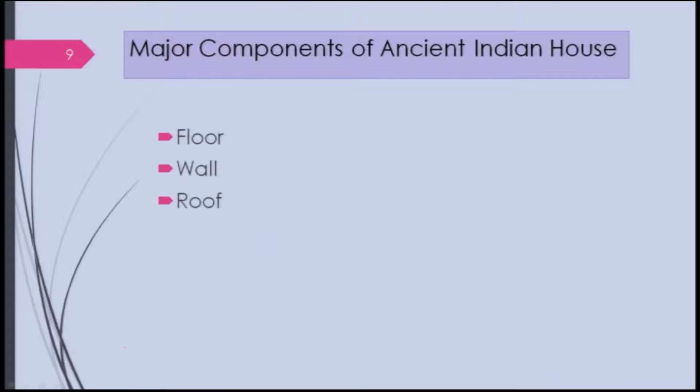So that is what we need to look at in our ancient Indian way of making and maintaining houses. If you look at the major components of an ancient Indian house, they are basically floor, wall and roof. Here I have shown you something about that.

This is your roof, and these are the walls. Of course, the floor is here, which you can call veranda kind of thing. So rural material house is basically made of stone and bricks.

Of course, bricks you can make yourself, not buy. I remember when I was a kid, local people knew how to make bricks. But today, if I go back to the same place where I had learnt how to make bricks in my childhood, they do not know how to make them, and they buy from factories.

And mud, which is plentifully available, and wood, bamboo and agricultural waste were being used for making houses, which was basically sustainable. Even brick is, to some extent, sustainable, though stone is not. Today what we use is not sustainable, but in earlier days houses were sustainable.

Let us see what we mean by mud, because today we are not aware about mud. In earlier days, mud was part of life, not only for agriculture, but for making houses and ponds, and several other things, as part and parcel of our life.

So mud is basically a mixture of different kinds of soil. It can be loam, silt, or clay. Of course, you will have to add some water. When you say mud brick, it basically means one that is not baked. Today we are using baked mud bricks, but when it is not baked, it is known as adobe, and it can be made by mixing mud with water and placing this mixture into a mold.

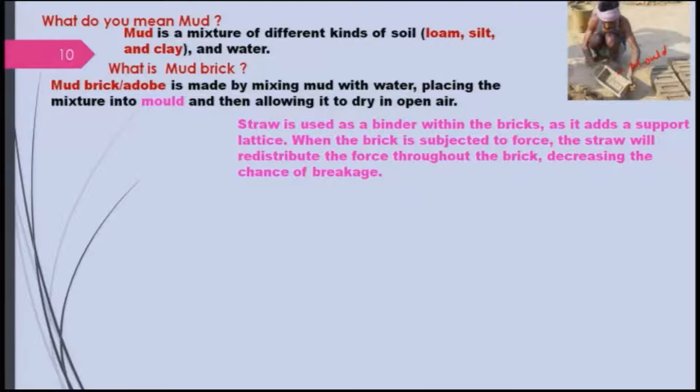People add straw and rice husk and other things to the mud. Straw is used as a binder within the brick, as it adds a support lattice, because whenever a brick is subjected to a force, the straw will redistribute the force throughout the brick, decreasing the chance of breakage. This is traditionally used, and similarly sawdust and other agricultural waste is also added to the mud for making bricks.

This is a house made out of mud, not only the wall but also the roof, in Punjab. Even still in some places it is being used. This is a pakka house, and there is a kacha house also, which is basically a mud wall with a thatched roof, but here the roof is flat and also made of mud.

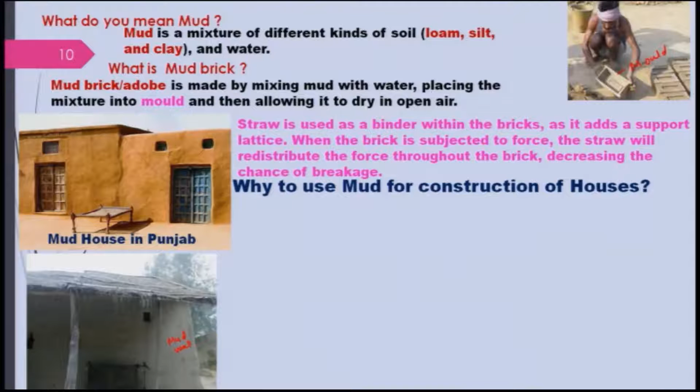Why do we use mud for construction of house? Because it is easily available for community participation and used by unskilled labor. If you look at earlier days in the rural areas, we had ponds. For maintaining ponds, you sometimes need to remove the mud from the pond, and that mud was generally taken by people who wanted to construct a house. There was a whole system cycle, beautifully narrated in several places, but unfortunately today the pond is not there, and even the mud from the bottom of the pond is used for the field for agricultural purposes.

Adobe or sun dried bricks are easy for cutting and adjusting the dimension of the mud brick, unlike the baked mud which is a little more difficult, though it can also be used. No energy is required for making the mud brick, as solar energy is used for drying, and cost-wise it's a lot of saving, almost 40% compared to regular brick. The use of mud in building gives good acoustic and insulation properties.

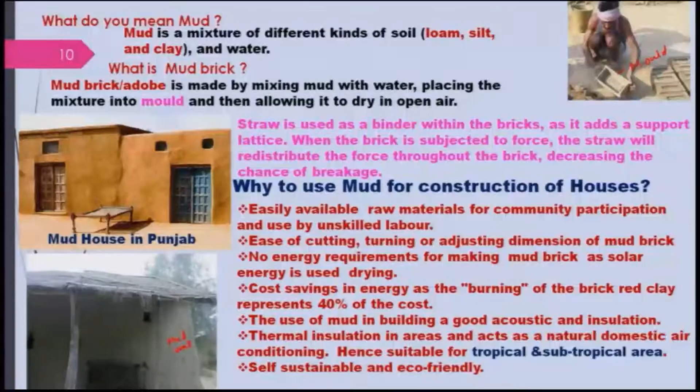Today people are using glass for window panes, and brick, and of course mortar and cement. Earlier days we used lime or mud, which is a better material compared to Portland cement today. It is self-sustainable and eco-friendly, because you don't need to burn fuels or do anything extra. Therefore it is very important to use mud, and mud is part of our culture, and we always revere it as part of our rituals.

If you look at the thermal design of a rural house, you can think of this as a roof, made of mud, with mud walls, and the roof is a thatched house with a thatched roof, and there is an overhang here. If you look, this is the wall and this is the overhang. Now why is this overhang there? Why doesn't it just end wherever the wall ends?

It protects the wall and other regions from thermal heating, particularly in summer. Not only that, when you're using the mud wall made of adobe or sun dried mud brick, you have to take care that water should not fall on the wall, as it will damage it. So that is another reason for the overhang.

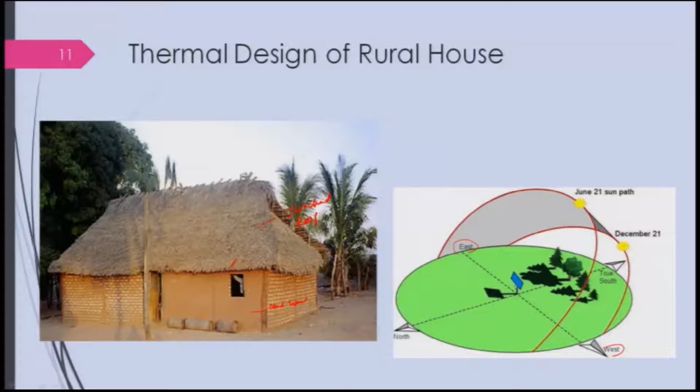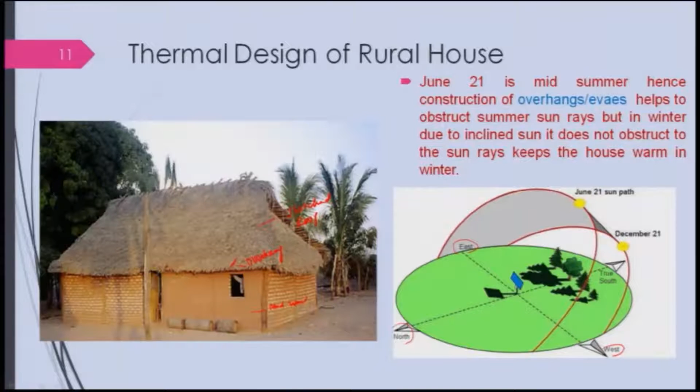Of course, this is the east side, keep in mind, this is your east side and this is your west, similarly this is your north and this is your south. Now, if you look at June 21, it is the mid summer, hence the construction of overhangs or the eaves, what I told, this is the overhang, helps to obstruct the summer sun rays, but in winter due to the inclined sun, the sun is at a different, smaller angle, it does not obstruct the sun rays, to keep the house warm.

That means, in the summer it will protect the house from the sun rays, so that it will not really heat it up, but in the winter it will allow the sun rays to enter into the house and keep it warm. What a beautiful design it is, right. But today when we are making houses, we are not thinking about it, okay. Right. This is the same figure I am just doing.

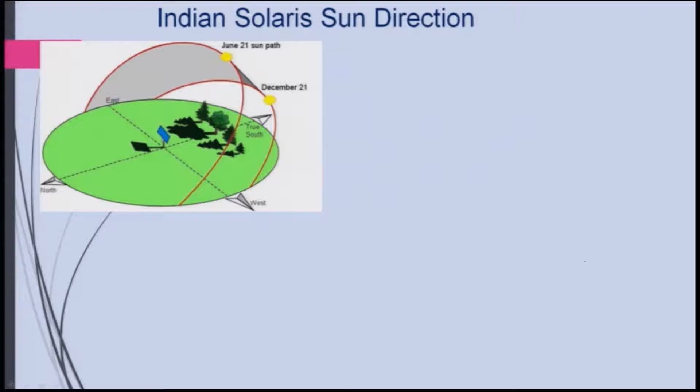If you just rotate that inclined roof, if I put the house by 90 degrees, like this, if I say this is your east here, right, and this is your west, my house will be like doors are to the south, right, and of course, the windows and other things will be on the north side and the east and west side. If you do that, morning sun will come on the eastward inclination, right, and evening sun will come to the west side. It will come in the morning from the east, and then go to the west. That is the normal thing in the summer, and winter will be like that way.

So, what will happen if you look at the, of course, this is taken for the 40 degree latitude, right, because that is corresponding to Indian condition. Of course, that angle will vary from region to region, but let us consider this angle. So, June 21st the sun rays will come directly here and it will hit the plinth area, this is your plinth area, then your wall is not affected by the sun rays, provided this overhang is here, right. But suppose it had not been there, then it would have fallen on the whole building. But in the winter, these rays have a different angle, that is 26.6 degrees kind of thing. So, then it will enter inside and it will warm.

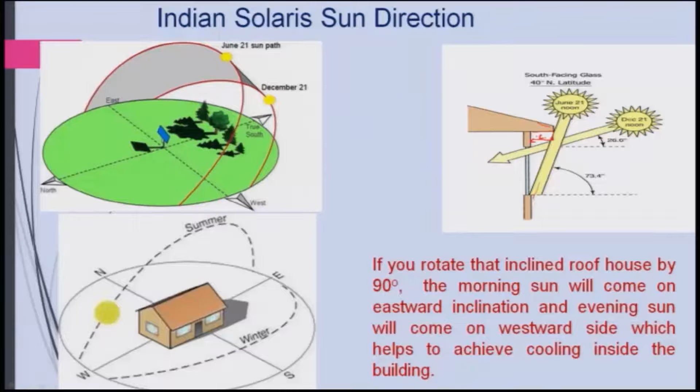See, that is the beauty of the design, right, and this of course depends on what length you have to give, this length, and this length is very important, and they have developed that thing, right, over the years. Of course, it will be varying from region to region. It is not that they knew that precisely at that time, I guess, but they knew what is to be done. That is the beauty of traditional knowledge, but we do not know it in modern times. Whenever we make a house, we will not have an overhang, right, and say, oh, it is hot. Of course, due to global warming there is a rise in temperature, but we need to relook at this traditional wisdom of making houses, right.

Let us look at other things. Of course, there is one way of putting this overhang here, but there is also a thick wall having this angle, such that again the summer sun can be avoided, whereas the winter sun can enter into the house. Okay. So, that is the thing you need to look at, right.

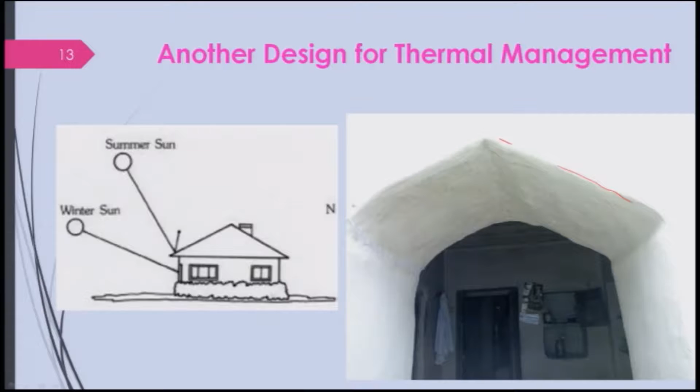There are various designs you can think of across the country, but unfortunately we have not kept track of it and we do not have documents, at least I am not aware of it, of course with my limited resources and the time I am spending for this work. This is not my usual work. And of course I had a talk with several civil engineering people and they say that they do not have any information, you know. I have talked with various faculty members.

So, what are the other advantages of an inclined roof house? I used to wonder why they are making it inclined.

So, keep in mind that these are the inclined houses, and these strips are there, these are bamboos or the strips, and it is to protect it from getting blown away by the wind. Okay. Now, if you look at what happens if the solar rays are coming in, what will happen? Some of this will be reflected.

If it had been the flat one, what could have happened? Suppose it is a flat house, what will happen? The sun will come and directly hit, right, but here it is reflected back, and some of the heat will be entering here and some of the heat also will go back, so that less heat will be retained in the house, and that is the beauty of putting this inclined roof, and we are not doing that.

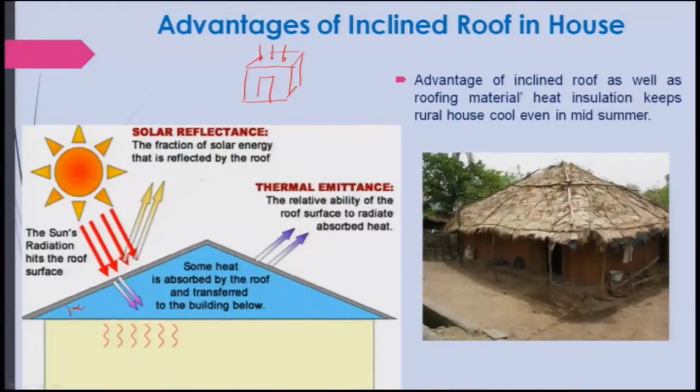Okay. And of course the question arises, what angle we will be making. And let me mention again the relative ability of the roof surface to radiate absorbed, because it will emit a lot of radiation at the same time, and it is a bad conductor, this is also insulating material, and it will not absorb the heat like a concrete building. Concrete buildings will be absorbing a lot of heat, but here it is not. So, that is also another important point you can think of.

So, let us look at aerodynamic design of a house. In earlier days people were putting the house near the trees and there might be hillocks, and that is the reason why people plant trees like neem and mango around the house, so that it will act as a barrier for the wind, and at the same time it will allow the wind to enter. Are you getting? You are putting some barriers, so it will take the load, but the wind will come.

But if it is a cyclone, then there will be a problem, because if it uproots the big trees and they fall on the house, it will be damaging. So, that is also one concern, but there are ways of doing it. People, I remember, used to tie the old trees, identify them and tie them, but that is maintenance that needs to be taken care of. And the air quality will be improved by these trees, particularly neem and even mangoes.

So, the shape of the building is very important for withstanding wind load. Generally a rectangular shaped house is used, length to width around 1.5, and this is basically height to width, this is your width, this will be height, and height to width 1. Basically if it is 1, it is a square house. So, square houses are safest for the wind.

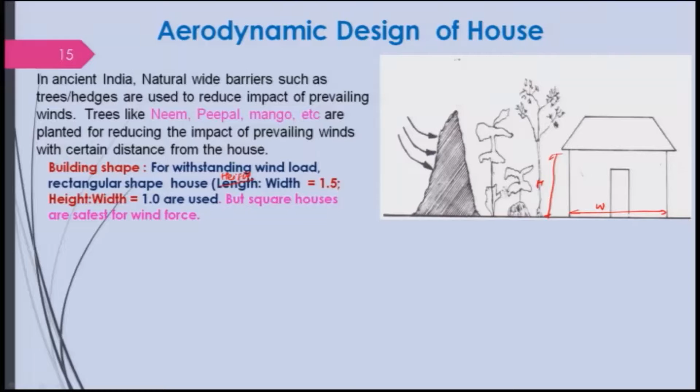If you look at most of the houses, barring a few, they are built in a similar way, and in modern days we do not take it into account. And pyramid shaped, steep roofs are best for avoiding wind force damage, and building orientation is very important, because it has to be fixed with respect to the direction from which the wind or the tidal force is coming.

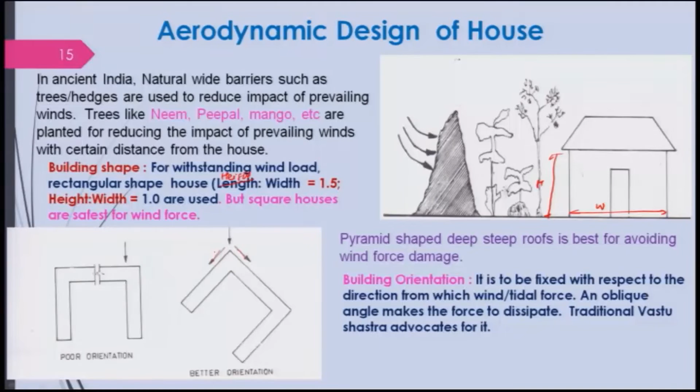Therefore, generally it will be put at an angle, that is the very important point which is there in Vastu. Traditional Vastu Shastra advocates, for example, if the wind is coming over here, it will impact the wall, but then it will be diverted, and the load will be less, and that is reflected in the Vastu itself. So, we will be discussing more about the design of houses in traditional wisdom and what people were using in ancient days. There is a lot of science involved in it, and they were practicing it, not talking about it.

So, with this I will stop, and we will be discussing more about rural housing and its scientific aspects in the next lecture. Thank you very much.